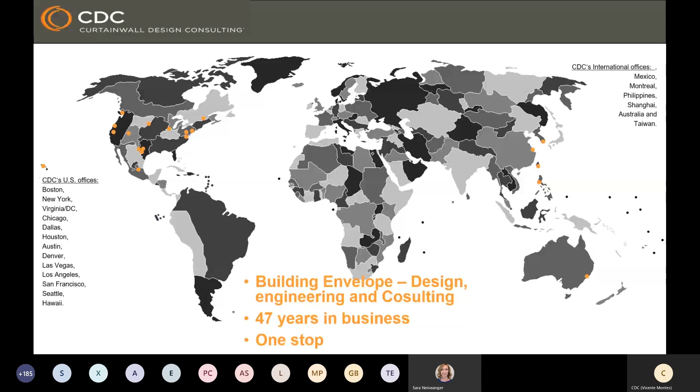The outline for this presentation: we're going to go over the 2018 IBC glass railing system requirements. We'll also touch on the ASTM E2353 and ASTM E2358 standards. These are the standard test method for performance of glazing in permanent railing systems, guards, and balustrades, and the specification for performance of glazing in permanent railing systems, guards, and balustrades.

I don't know—I'm getting some feedback. Would you please mind muting your phones? I'm getting some feedback. Could you please mute your phones?

Thank you. So, the learning outcomes: by the end of this webinar, you will be able to list resources available to determine the IBC requirements for guards, top rails, handrails, and safety glazing. Now, you have to keep in mind that guards and top rails are not the same.

By definition, guards need to resist certain loads and requirements that we will discuss later, and the top rail is simply, for the sake of this argument, a glass edge protector. That's all.

Handrails—everyone is familiar with that—and safety glazing, you will also learn about the general requirements. We're also going to be able, at the end of this presentation, to identify and specify the correct performance and design requirements. So, glass railing systems.

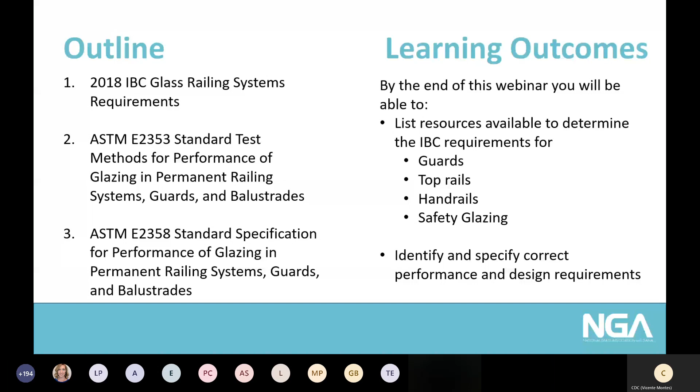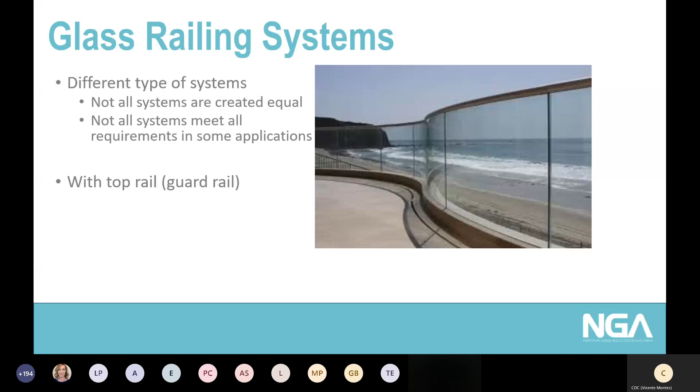There are different types of systems, and you have to know that not all systems are created equal. Not all systems meet all requirements in some applications. Here's just a few examples. This one here is a top rail example, and this one here is with vertical posts.

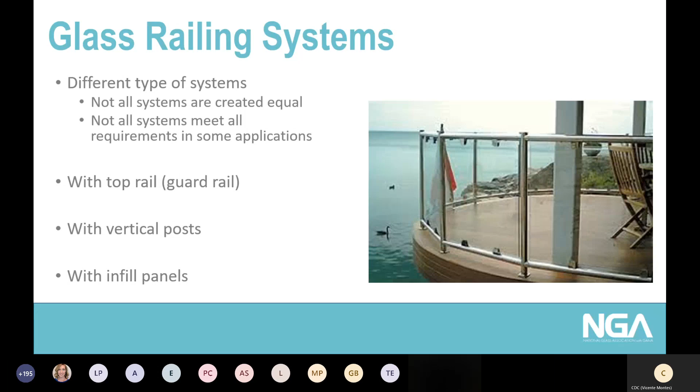This one is infill panels. Infill panels have a less stringent requirement per building code. Here's more examples—these examples are for unobstructed views.

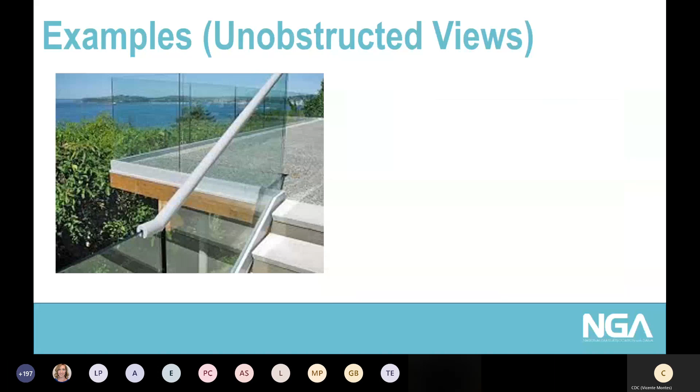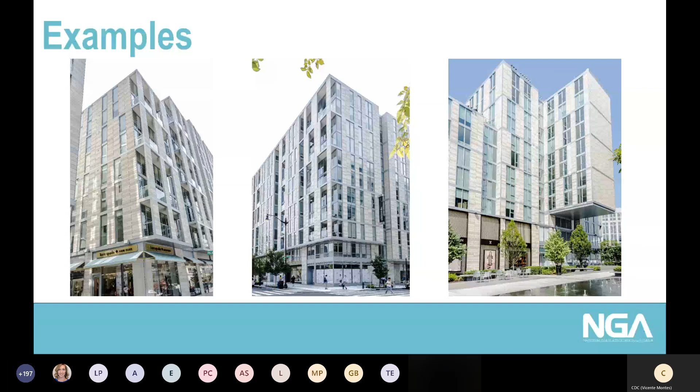It's important to know that sometimes glass railing systems are left there without any specification or attention. When projects hire a building envelope consultant, sometimes they oversee this, but this is very important, just as much as any other system.

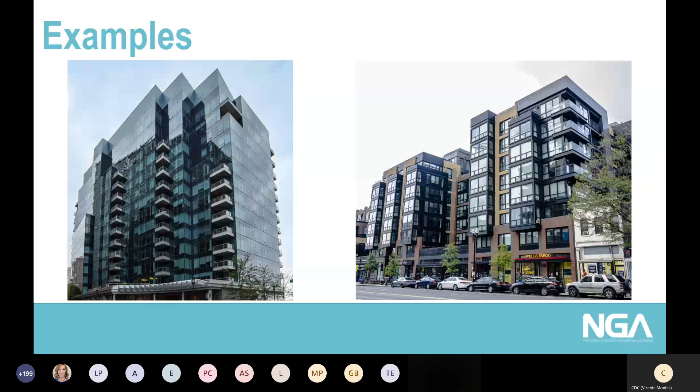And in lawsuits, all documents are discoverable, and the different parties were going to be reviewing the documents. And if any requirements happen to be missing or not there, or the installed system doesn't meet whatever it is, then you are on the hook for it. Of course, the building code is not intended to protect cases or cover cases like this guy here, Mr. Legend. But if something had happened, then it was going to get ugly.

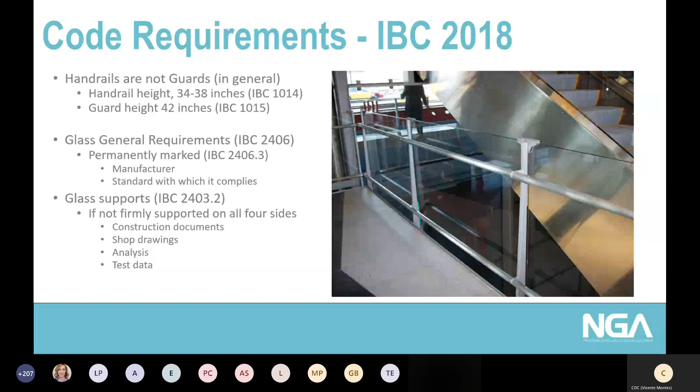In general, the general requirements for glass, and this is for all glass in buildings, safety glass needs to be permanently marked, and the label, the glass bug, needs to have the manufacturer and the standard with which it complies. Now, another general requirement for all glass in buildings is that if it's not firmly supported on all four sides, you need to have construction documents, shop drawings, analysis and test data that proves and demonstrates that whatever you're installing meets all requirements.

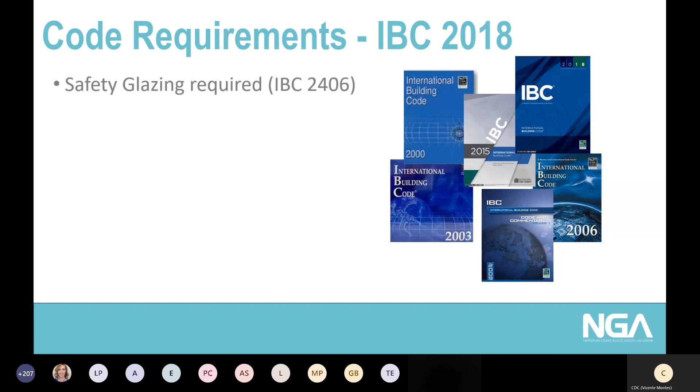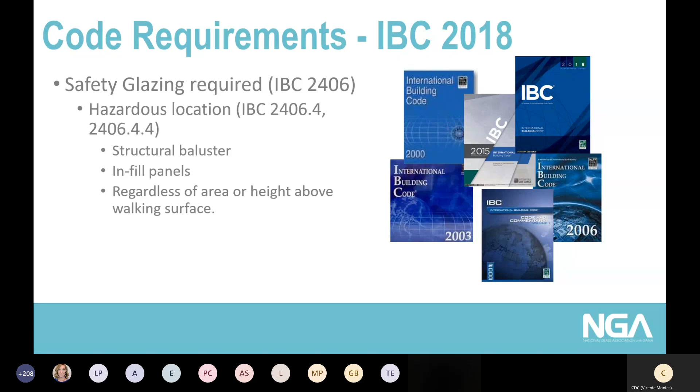Another requirement for safety glazing: safety glazing is required on different locations per the code. One of those locations is glass in railing system applications. This is defined as a hazardous location, and hence you need to have safety glazing. On this section in particular, it states that structural glass balusters, infill panels, need to be safety glass, and this is regardless of the area or height above a walking surface.

Now, hazardous location requirements say that the glass in these locations needs to meet the impact test per CPSC 16 CFR Part 1201. The CPSC is the Consumer Product Safety Commission, and CFR is the Code of Federal Regulations. Please remember that glass is the only material that is regulated by the federal government.

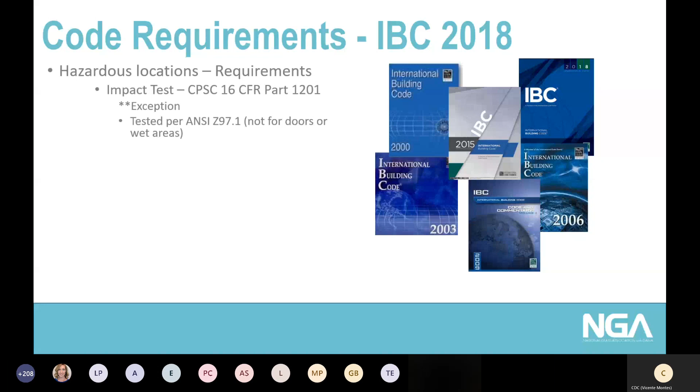There's only one exception though. When your glass is not for doors or is not going to be located around a wet surface, then the glass could be tested to ANSI Z97.1. Now, CPSC uses the testing procedures listed on ANSI, and both CPSC and ANSI have two categories for glass. One category is for glass that is less than 9 square feet, and the other one is for more than 9.

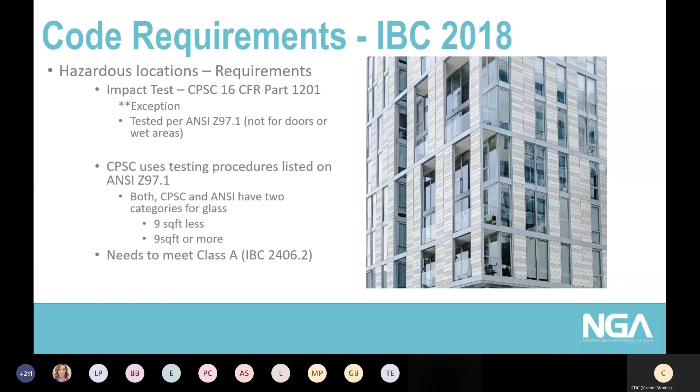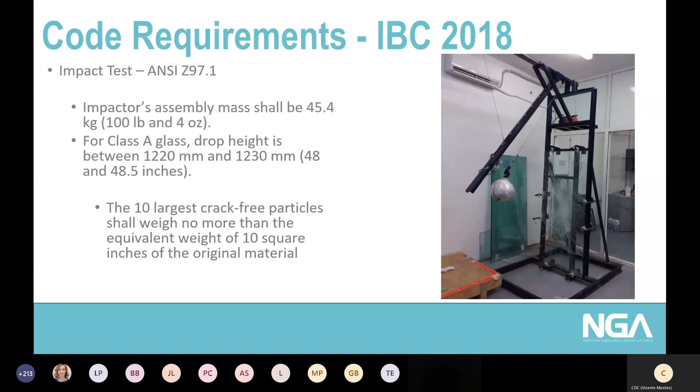Glass in railing applications needs to meet classification A, Class A. The impact test per ANSI Z97.1 looks something like this. You have an impactor assembly, and the mass of this impactor needs to be 100 pounds and 4 ounces, very specific. And to meet Class A, your drop height needs to be between 48 and 48.5 inches, also very specific. The pass-fail criteria is that the 10 largest crack-free particles should weigh no more than the equivalent weight of 10 square inches of the original material.

Now, glass in handrails and guards. Per IBC 2018, glass in handrails and guards has to be laminated glass. There's no option, there's an exception, but all glass needs to be laminated, and it needs to be category 2 or Class A. Now, in IBC 2012, having laminated glass was an option. So you have to be careful, and you have to know what building code your building is under, or what you're going to use for the permit, because 2012 and earlier versions did allow for laminated glass.

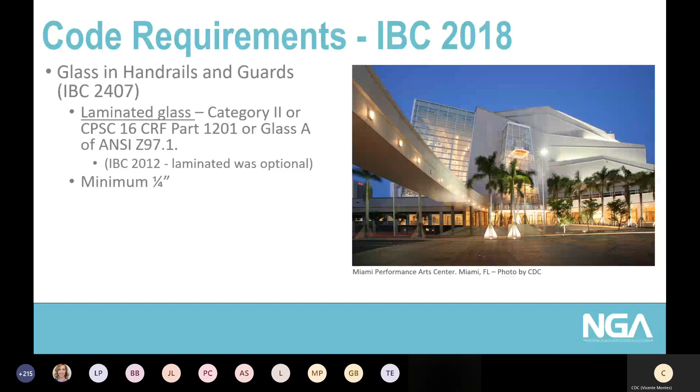But now, in 2015 and 18, it's a must, except if it's monolithic glass - you could have monolithic glass if it's not located where there's a walking surface beneath, or the walking surface beneath is permanently protected from the risk of falling glass. As you can see here on this photo, there's a balcony with glass at this Miami Performance Arts Center, and it's permanently protected. The walkway underneath is permanently protected with a canopy.

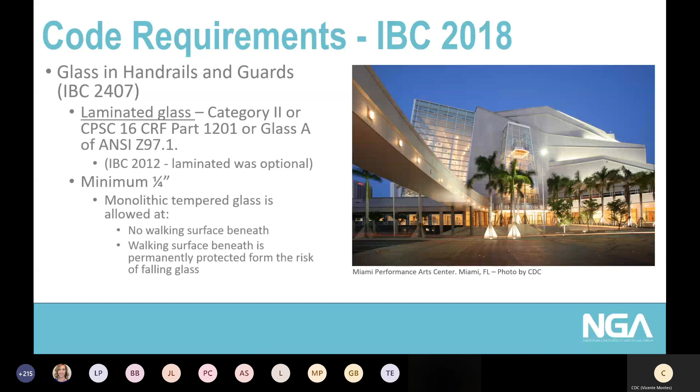Now the code requirements - can you still hear me? Because I got a message saying that I was muted. Yes, we can hear you.

Thanks, okay, thank you. So the code requirements, the loads that your railing system needs to meet, are 50 pounds per linear foot applied at the top, or 200 pounds applied at the top. Now, for these loads and for design purposes, you have to use a design factor of 4.

This is only for design. We've seen people show up to project sites to test compliance of the rail systems, and they start testing to 800 pounds, which is 200 by 4. This safety factor of 4 is only intended for design, not for testing. Very important.

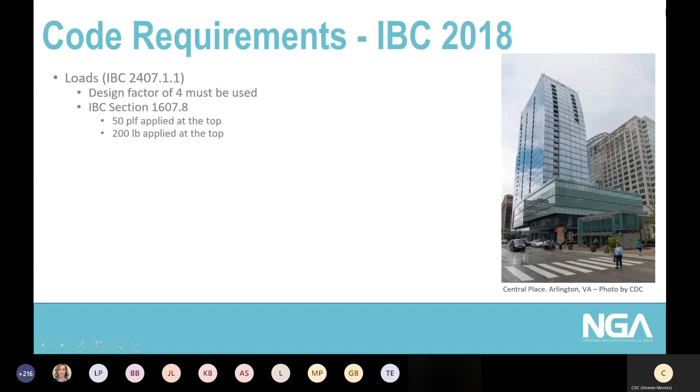Now, a general requirement for glass - this is in general, all glass in all buildings - vertical exterior glass needs to resist wind loads when it is exposed to it, and all glass in exterior applications is. It needs to meet the wind loads per components and cladding. We have also seen calculations from companies that use a freestanding wall approach to determine the wind loads on the rails. That is not accurate, that does not meet code.

Also, each guard section needs to be supported by a minimum of 3 glass balusters, and the guard needs to remain in place if one baluster panel fails.

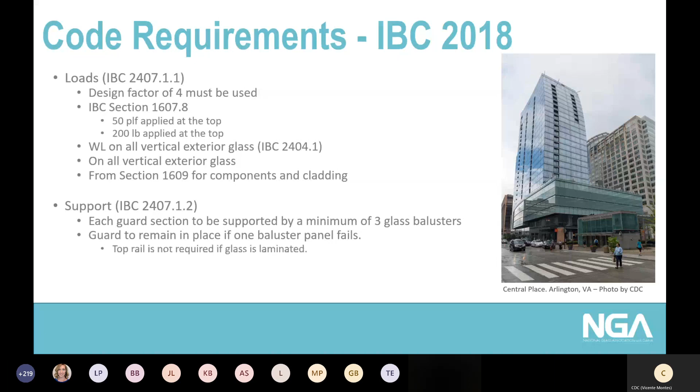Now, the top rail, or this guard, is not required if the glass is laminated. So this particular section only applies in cases where you are allowed to use monolithic glass. And just to remind you, like a couple of slides ago, monolithic is only allowed where there's no walking surface or the walking surface beneath is permanently protected.

Some local codes, however, do require a top rail, a guardrail, so this would not apply. This is for Chicago - the city of Chicago does require a top rail.

Very important, this last one, because the code requirement says that glass panels shall be tested to remain in place as a barrier following impact or glass breakage. This needs to be in accordance with ASTM E2353. So after impact, and even if glass breaks, it needs to remain in place and remain as a guard.

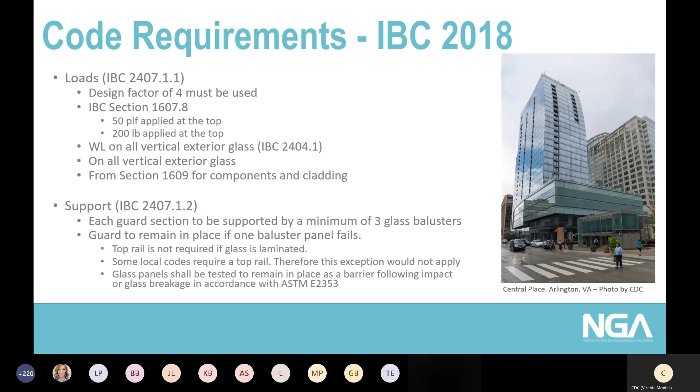Upcoming code requirements - this is for 2021 IBC. There's no major changes, just some language clarifications here and there, but no major changes.

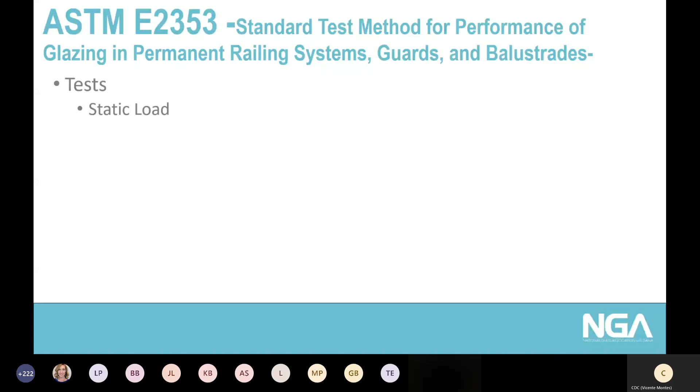Now, let's go to ASTM 2353. This is the standard test method for performance of glazing in permanent railing systems, guards, and balustrades. There's 3 different types of tests per this ASTM: the static load test, the shot bag impact test, and the pendulum impactor test.

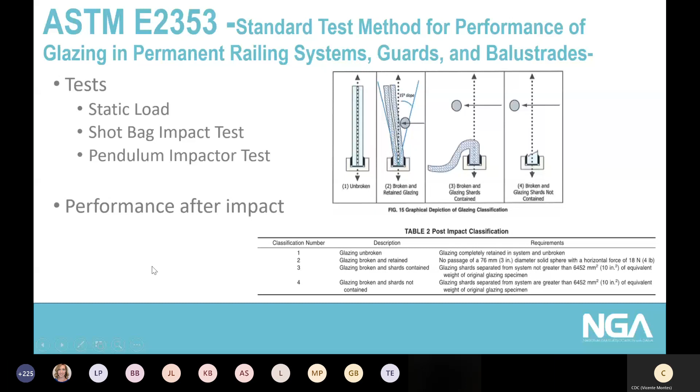Now, there's 4 different classifications per this ASTM. But if you remember the section we just emphasized - that the glass after impact needs to remain as a guard - that means that per that code requirement, classification 3 and classification 4 would not meet that requirement. So we're looking at classification 1 or 2 to be able to meet the IBC.

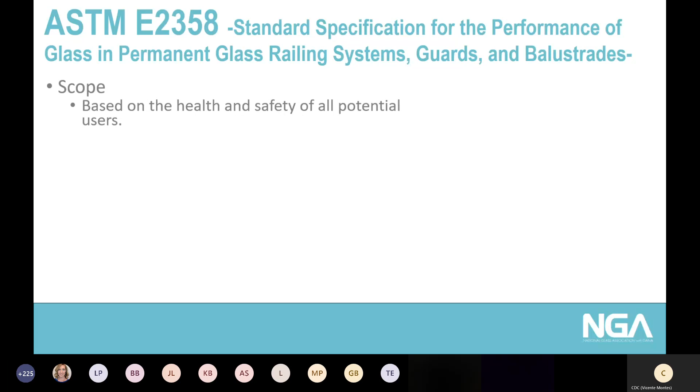Now let's move from 2353 to 2358. 2353 is the test method, 2358 is the standard specification. The scope of this specification is based on the health and safety of all potential users, and is also intended for normal and anticipated building uses, but not for abuses.

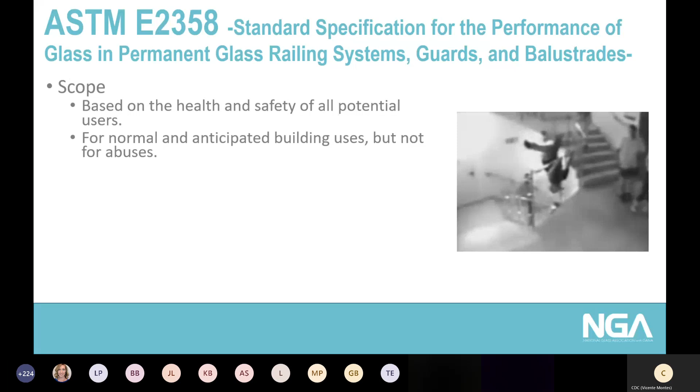This is literally what the specification says. So Mr. Legend here from the video before would definitely not be in the scope of this ASTM.

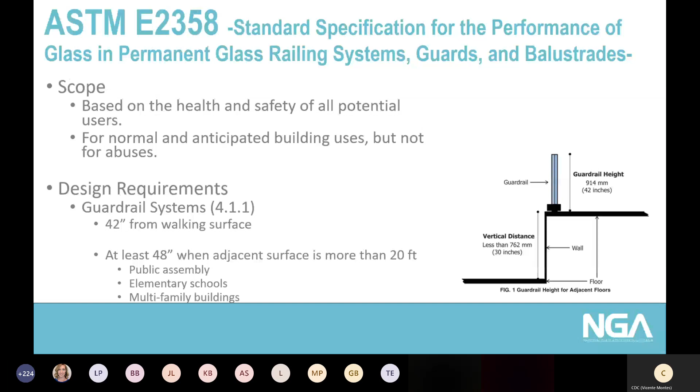Design requirements: you need to have your guard rail at 42 inches from the walking surface, and you need one if the surface below is 30 inches or more. But for certain applications, like public assembly, elementary schools, and multi-family buildings, the top of the guard needs to be at 48 inches if the surface adjacent to it is more than 20 feet.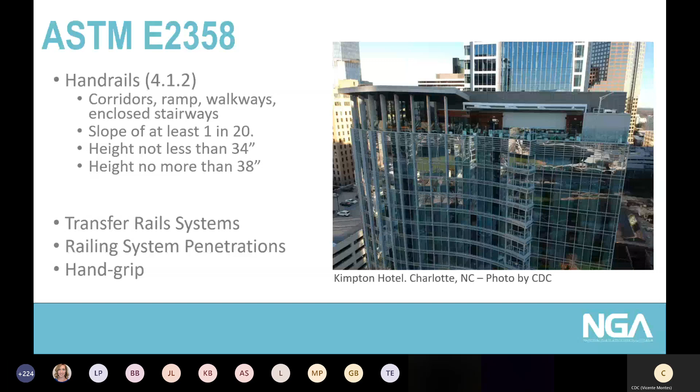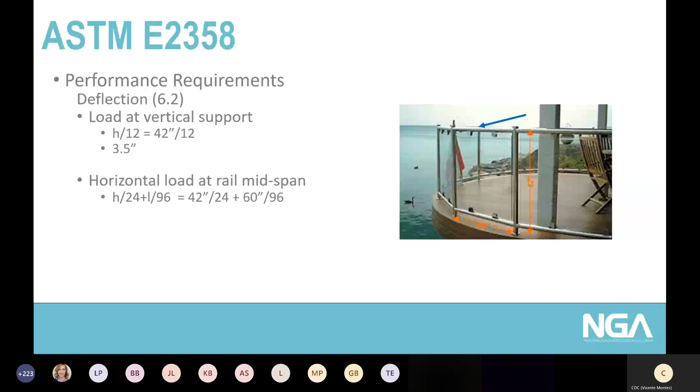Now, performance requirements - this is the deflection performance requirement according to 2358. When the load is applied at the vertical post, the criteria is H/12. For this example, which is 42 inches from the walking surface, it would be 3.5 inches. When the horizontal load is applied at the midspan of the rail, the criteria is H/24 plus L/96. For this example, it would be 2 3/8, the allowable. And finally, when the vertical load is applied at the rail midspan, this is the criteria - for this example, 5/8.

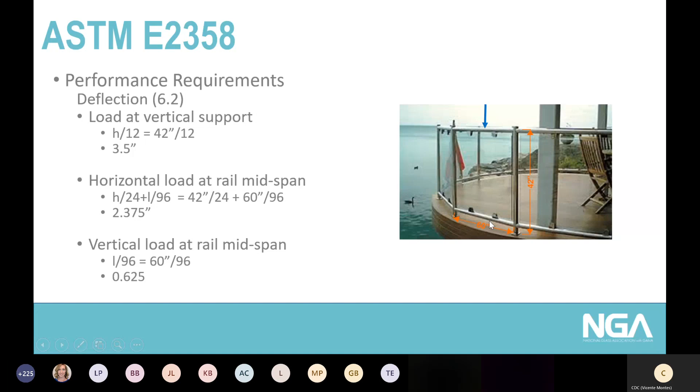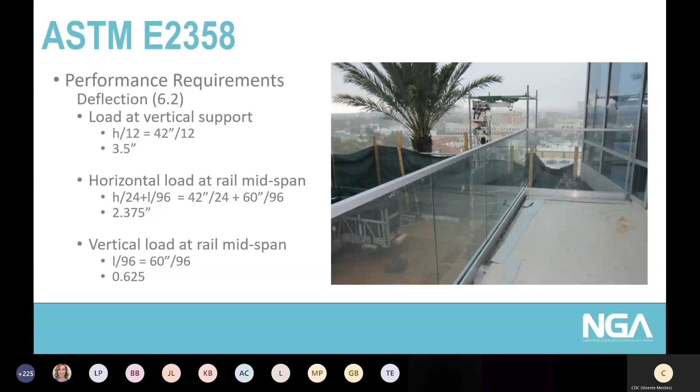3.5 inches of displacement at the top is a lot. Just imagine leaning on this vertical post and the system itself displacing 3.5 inches - that definitely wouldn't feel safe. And when you have applications like this, on the photo, where you have the shoe mounted to the substrate, if the shoe is not mounted properly, the shoe itself can rotate. That, in concert with the fact that the glass is very flexible, can get you to 3.5 inches in no time. So I think that overall, as an industry, we can do better than the criteria listed here.

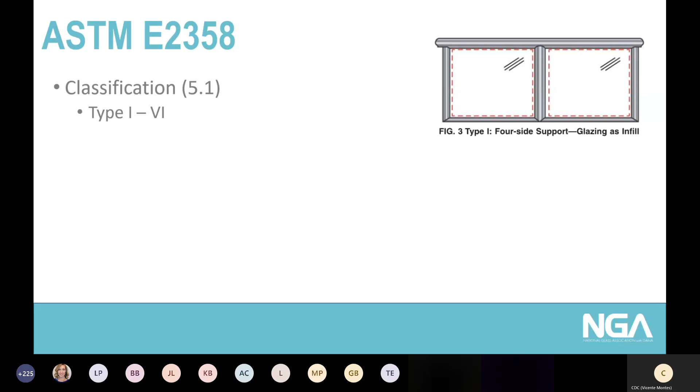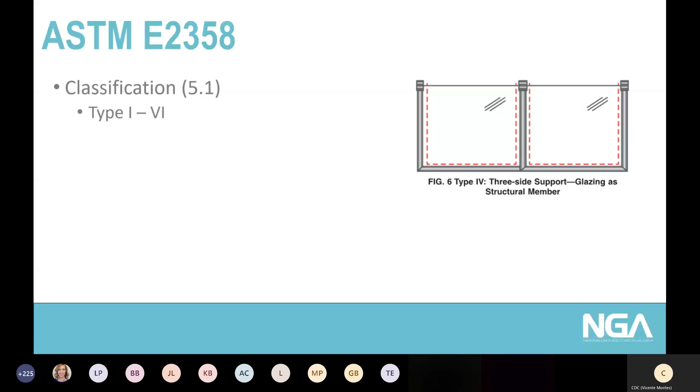For ASTM E2358, there are 6 different types of glass railing systems. Type 1 is supported on all 4 sides, so this would be like an infill panel. Number 2 is supported on 2 sides. Number 3 is point supported, just on the edges. Number 4 is supported on 3 sides. Type 5 is supported on 1 edge, and you see some examples there. And type 6 is supported at the bottom, but point supported.

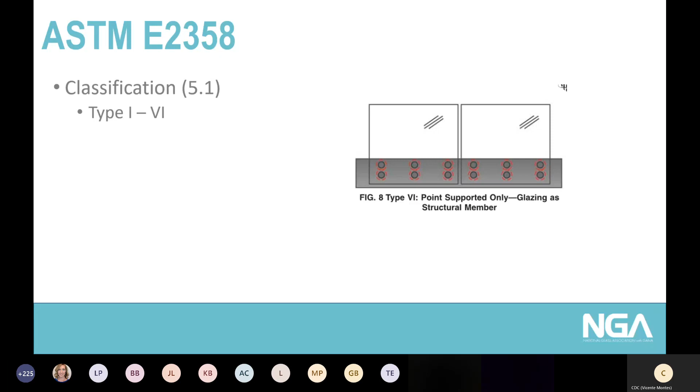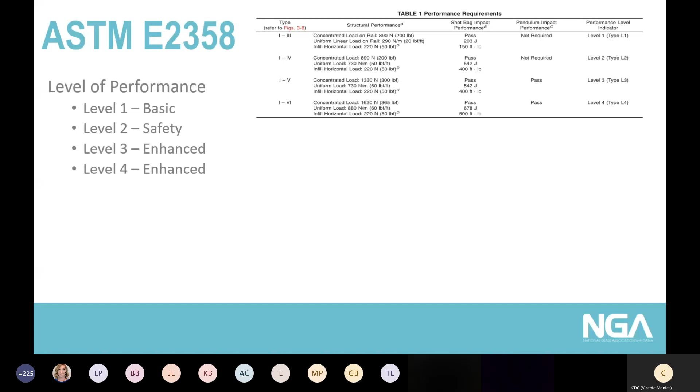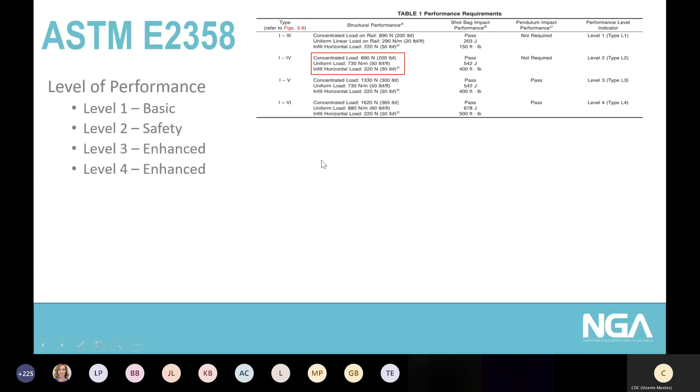Also, for 2358, there are 4 different levels of performance. Basic is number 1, 2 is safety, 3 and 4 are enhanced. Now pay close attention to the section highlighted in red - this is the criteria, these are the loads prescribed in the building code: 200 pound point load, 50 pounds per linear foot, and 50 pounds for the infill panels. That's the level the building code covers, level 2. If you go to level 3 and level 4, which are enhanced performance, the requirements are higher - you can see here 300 pound point load, and 365 pounds for level 4.

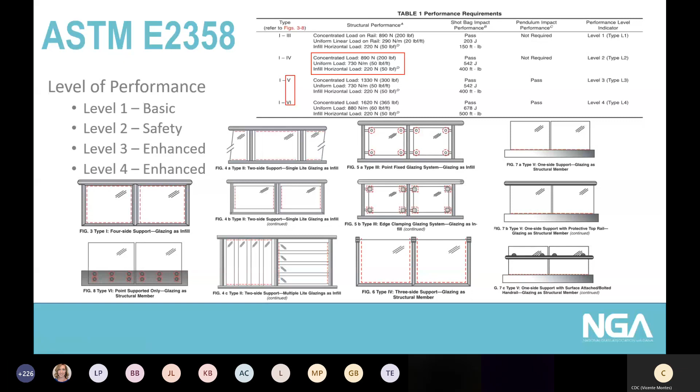Now, per the building code, this is it, as we stated. So when you are specifying, you have to know if you want to specify more. The building code is a given, it's a default - most states in the U.S. have adopted the IBC, so that's a given. But if you want to specify something more, you have to quote this ASTM, you have to reference this ASTM. Note that type 5 and type 6 - type 6 being point supported, and type 5 supported on 1 edge - have higher performance requirements per ASTM E2358. So you have to remember that.

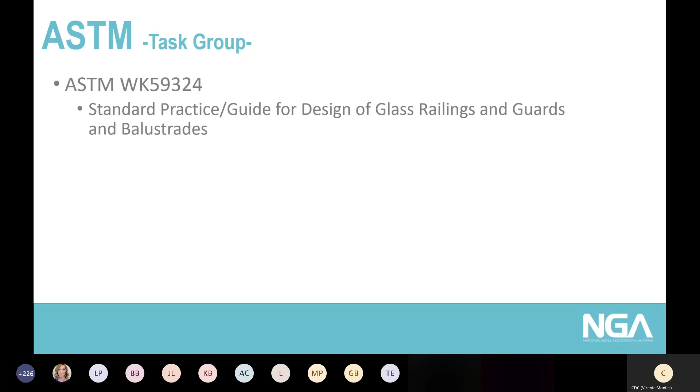Now, ASTM is currently working on a task group for the standard practice guide for design of glass railings, guards, and balustrades. This document is not out yet, but soon enough it will be.

And finally, for the end of this presentation, we're going to go through a few images and see if it meets code or not. This system here has vertical posts, has horizontal rails, and the glass is behind the horizontal rail. Let's say that is safety glass.

So do you think it meets code? Yes or no? We have a vertical post, okay. We have a horizontal rail at 34 inches from the walking surface. The glass behind is behind the horizontal rail, so we could probably consider that glass panel as infill. And the safety glass is not laminated. So, do you think it meets code?

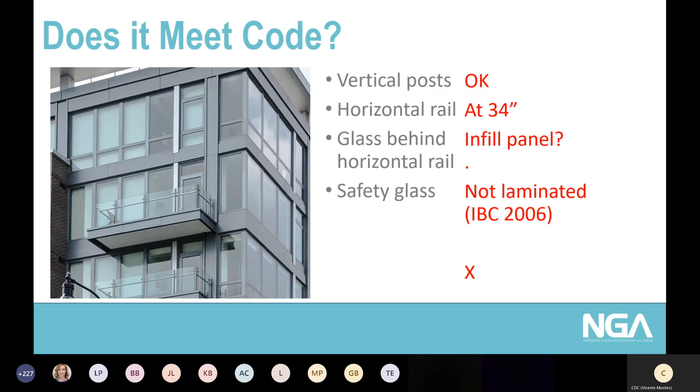The answer is it doesn't meet code. Why? Because the safety glazing is not laminated. This started with IBC 2006. You had the option to not have a top rail or guard rail if the glass was laminated. In this case, the glass is not laminated and you don't have a top rail, so if one of these panels fails, you don't have anything to protect you at 42 inches from the walking surface.

Which is the height required where you need to have a guard. Next one: you have the glass behind the horizontal rail, you have a handrail, you have a top rail, and you have safety glass. Do you think that it meets code? Infill panel, probably. The handrail is at 34 inches.

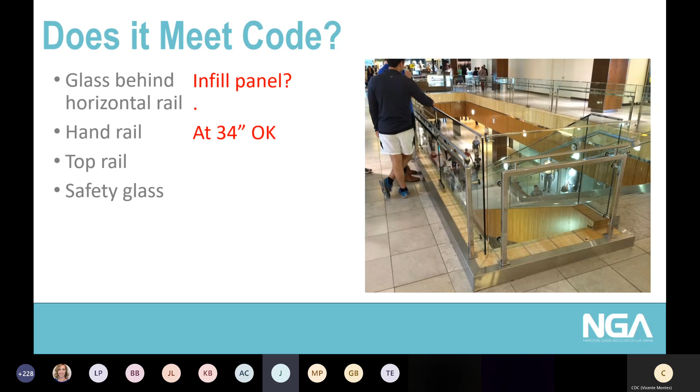Handrail is at 34 inches. There's a top rail at 42 inches, and the safety glass is not laminated. So do you think it meets code? Yes or no? The answer is it doesn't meet code. Why? The top rail that you see there is exactly that, a top rail. It's not a guard. That rail you see on top is just the edge protector, and it cannot meet the loads prescribed in the building code. It cannot resist 200 pounds per linear concentrated load or 50 pounds per linear foot. It just can't. So if a glass panel fails, that cap is not going to hold you inside the building in this application.

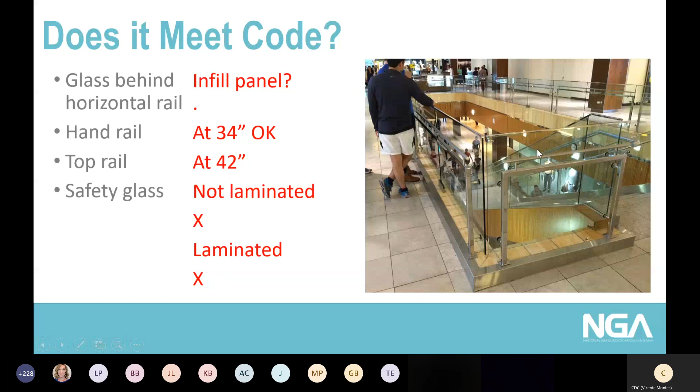So it's not laminated, it doesn't meet code. But now, what if it was laminated? Would it meet code? It wouldn't. Still wouldn't. Why? Do you see this panel at the end? One of the requirements is that each glass baluster needs to be supported, the top rail needs to be supported by 3 glass balustrades. In this case, this one is pretty much independent, this one at the end here. So it doesn't meet code.

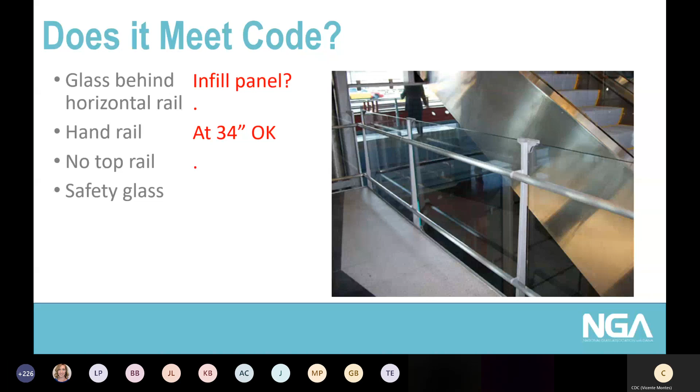Next one, we've seen this photo before: glass behind the horizontal rail, handrail, no top rail, safety glass, yes. So perhaps the glass could be considered as an infill panel, perhaps not, depending if you want to say that glass is your guard. But the glass would need to resist the loads specified. The handrail is at 34 inches, well, fine, you don't need the handrail in this application, only at stairs, ramps, etc., as we saw before. And the glass is laminated. So this case in particular does meet code if the glass is laminated. If it's not laminated, you don't meet code because you don't have anything at the top.

Finally, this is the last example. You have this application: a glass baluster, handrails, no top rail, safety glass. Glass baluster, fine. Handrails at 34 inches, okay, congratulations, but you don't need it. You don't have a top rail, and the safety glass is laminated. So do you need it, yes or no? I mean, does it meet code? Yes, it does. But something very important: per the IBC 2018, glass panels need to remain in place as a barrier following impact or glass breakage. So this, what you see in the photo, would need to remain in place.

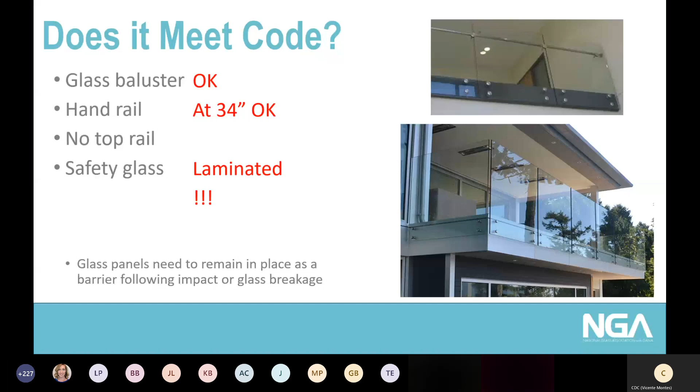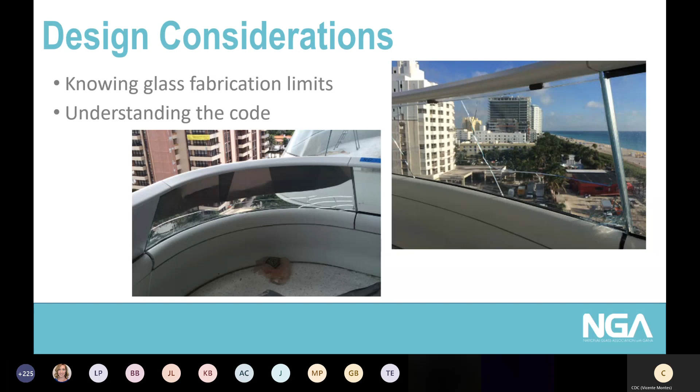The most recent question received regarding uplift force: is there a need to check that as it's a serious safety issue also? Uplift force? I suppose this would come from someone like picking up the system or so. Wind load, I mean, the system itself won't capture much wind load, so I don't think that would be a concern. But from someone trying to pick it up, yes, the point load and the linear load, which is 50 pounds per linear foot or 200 pounds, that is supposed to be applied anywhere and in any direction. So in any direction would be like picking it up. So yeah, the requirement is 200 pounds or 50 pounds per linear foot.

Okay, a two-part question regarding differential deflection analysis per IBC 2403.4. First part: is this section generally included in order to avoid a pinch point between two adjacent panels?

That's a good question. Well, so the differential deflection, there's a section in the code. It's on chapter 24. I don't remember exactly. The reference is 2405 perhaps, but this section talks about glazed areas in interior walkways. So if we can classify these systems as an interior walkway, then the differential deflection between each panel has to remain less than the thickness of the glass. That's what the requirement on the code says.

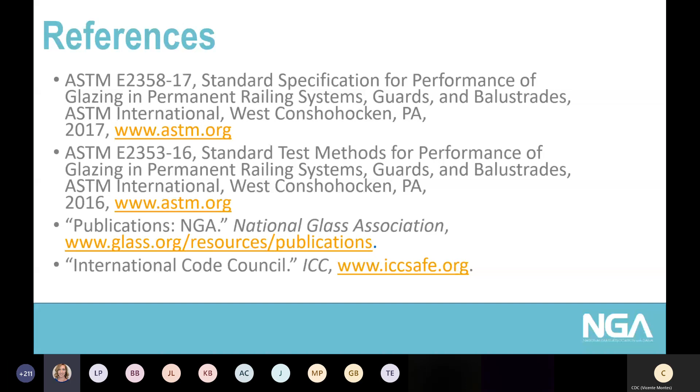Okay. Next question. I've heard that projects can be grandfathered and still use IBC 2012 laminated as an option. Is this correct? It seems after a certain time frame, grandfathered projects are no longer allowed. That would depend on the local jurisdiction, on the authority having jurisdiction on that particular project. I think that the safest way to do is, and this is just my personal opinion, to make sure that you know what building code your building is going to be permitted under, and just meet all the requirements for that code. Okay.

Another question. The code indicates design load is to be applied at the top. What if the glass is taller, say 8 feet tall? It seems unnecessary to apply the load at the top. Would you apply the design load at 42 inches? Yeah, again, this would be depending on the engineer's criteria. If we were doing this and following the requirements for the building code, the code says that you need to have a guard at 42 inches or 48, depending the case, from walking surface, right? So if we were designing this, we would apply the load at 42 inches, and we would also check a different case for applying the load higher.

Now, there's some cases where you have what is being called wind walls, where the glass is 6 feet tall or higher at parapets or amenity decks. For those cases in particular, if you have a piece of cantilever glass cantilevering 6 feet, the governing load is going to be wind load, most likely, and not live load. So you have to check everything.